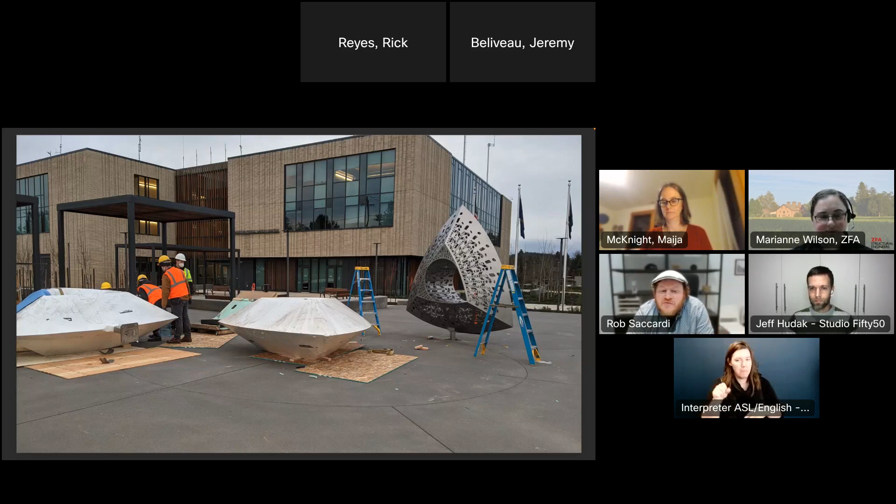And then this is the pieces getting put in. The electrician working diligently away, trying to get everything wired in place as the light was fading. We're chasing the daylight here.

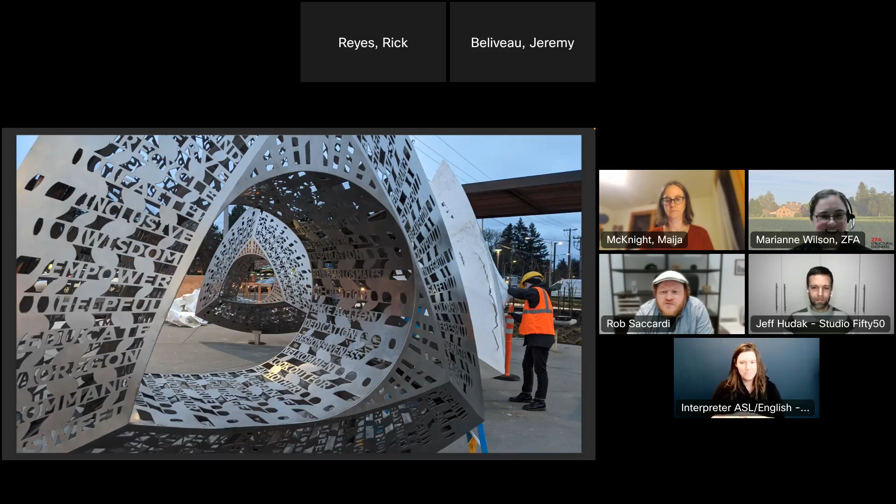And that's more of a finished shot.

This is a project we did in Cal Anderson Park for Horatio Law. This piece is called Lambda, and this was tricky because we had to get two large pieces of glass installed, but they don't support on their own. So we had to work more with the engineer to figure out how we were going to have piece A stay in place while piece B got slotted in there.

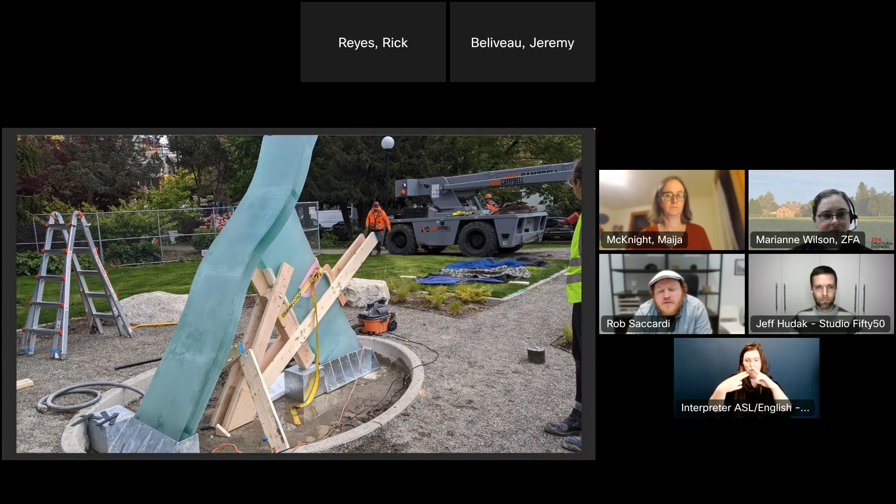And then you can see after we've gotten the piece in, unfortunately I don't have a great shot of it in action. And then we've got that armature taken off.

This is another piece, the same installation. This is a totally different thing. This was made up of glass plates that we got to stack together, so we really got to work by hand.

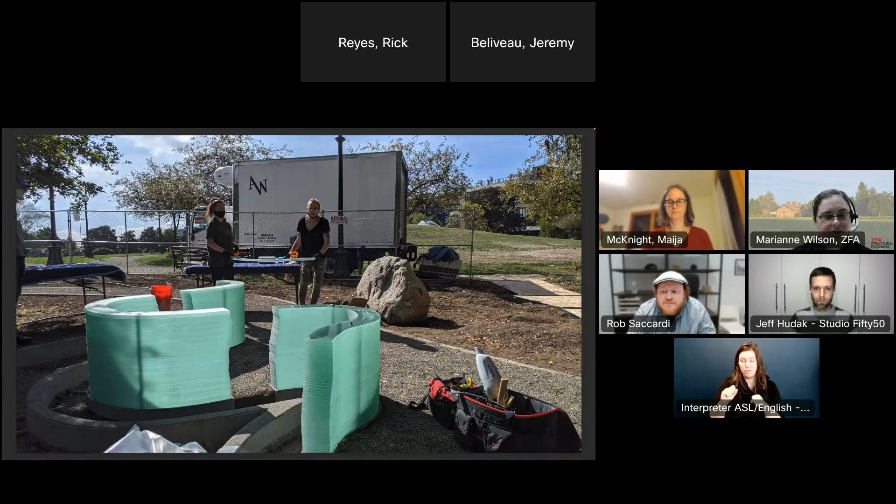And you can see the crew getting in there with, each piece with a suction cup on there so we could keep a good grip on it.

And then they get stacked up on those rods, which was kind of the finished installation.

The problem we ran into with this one is that out of those like 100-plus glass plates that got shipped over to us from Germany, a couple of them got damaged in transit. So we had to have new pieces made, and the artist had to be in contact with the fabricator and have new pieces shipped over. We had to swap some pieces out.

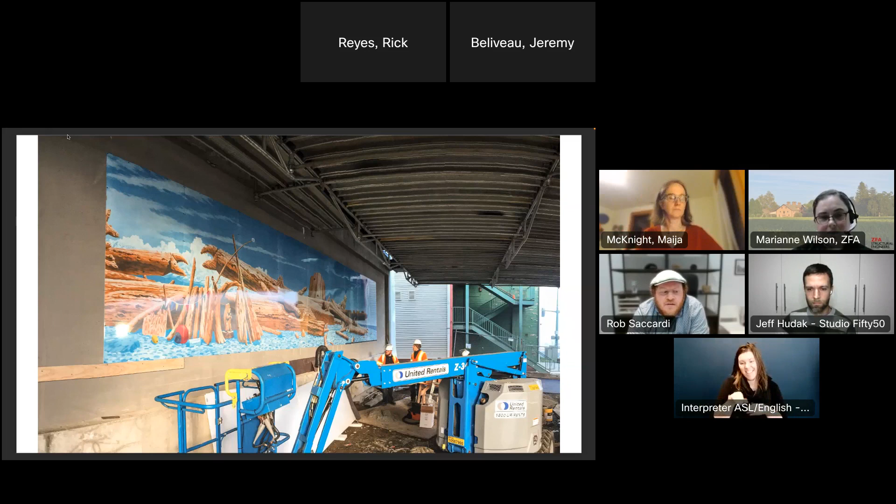This is us working again inside. The tricky part of this is just getting onto that wall. We're in a big, huge stairwell, installing a really large, really interesting wood three-dimensional piece. Next slide. You can see just sort of working from that scaffold in that space. Let's do the next one.

And the next one. And the next one. So that's kind of a range of the different projects we do. Next, thank you.

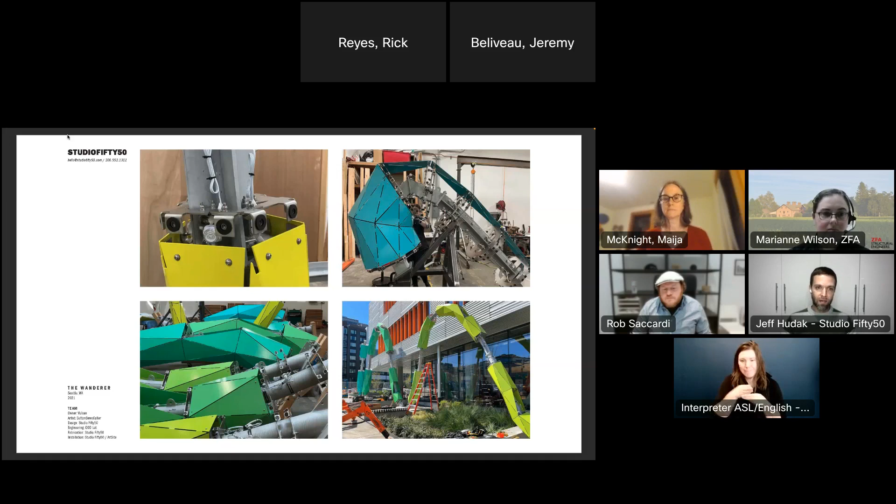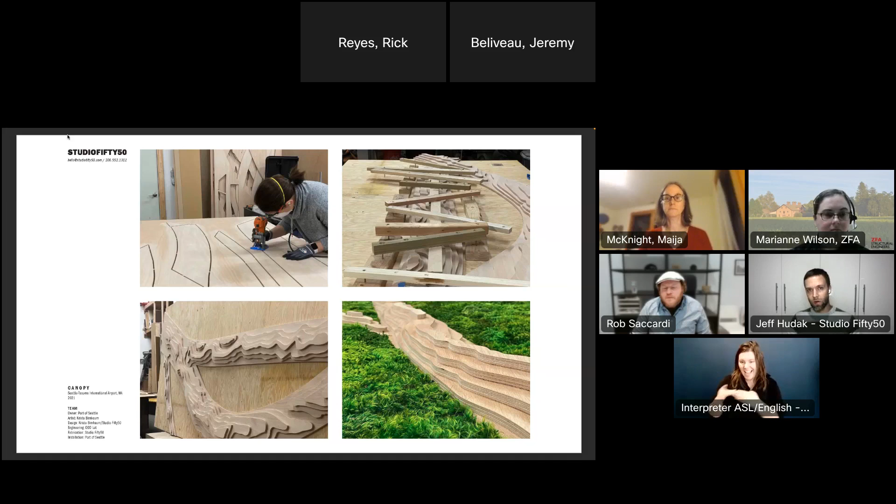Next slide. This approach allows us to include useful information such as part labels and fabrication alignment guides, things of that sort that are just etched directly onto the parts as we're fabricating them. That way, as we go into assembly and even installation, we've got these pre-built guides that we've brought from that digital model into the physical components.

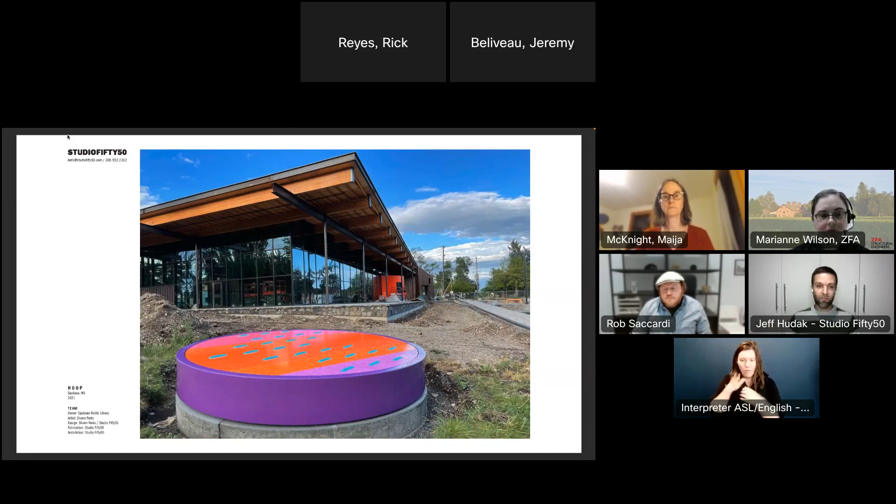It also allows us to evaluate the artwork geometry by using that 3D model so heavily, so that when we are figuring out exactly how we're going to lift or turn or pick a component, we'll look at where the center of gravity is in the 3D model, and maybe during the design phase we'll integrate a couple of pick points that allow us to orient it properly, just as it's lifted right off the vehicle, it can get dropped right into place.

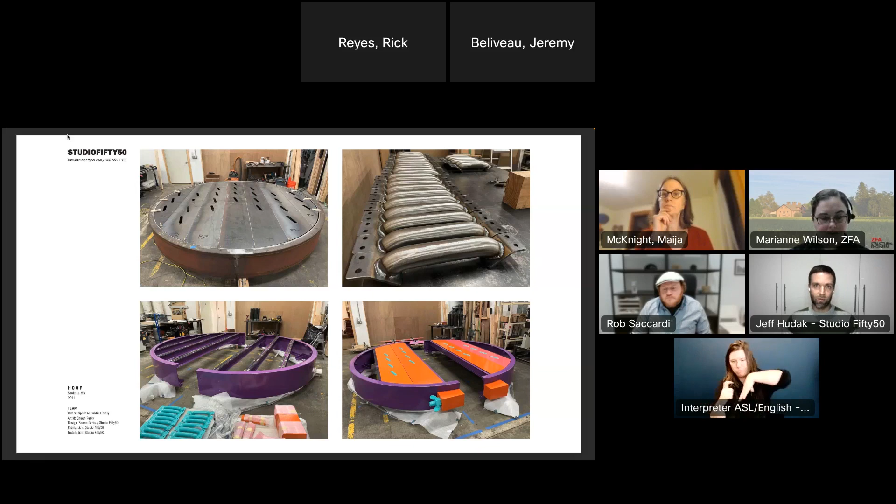So things like that, we really try to approach projects holistically, so that any of those downstream issues, coordination issues, some of those things we try to head off on the front end if possible. Not always possible though. As a studio, we offer a variety of services to various artists.

In some cases we're just providing an engineered armature, like for instance in the project we're seeing in the background. Can you go back one slide, please? Cascadia, which is at SeaTac Airport.

In this case, we provided the design services and fabricated the armature supporting these giant glass panels completely wrapping around an escalator bay. It was a tricky installation in a very public place. We provided the engineered armature and cladding, and the install was done by the Port of Seattle.

Other cases, we provide full service from concept development all the way through installation. We primarily do all of our modeling in Rhino 3D, as well as a parametric plugin called Grasshopper. These let us apply labels and other elements into our modeling without individually modeling each piece. It's kind of like writing a recipe for the artwork that allows us to create each individual component.

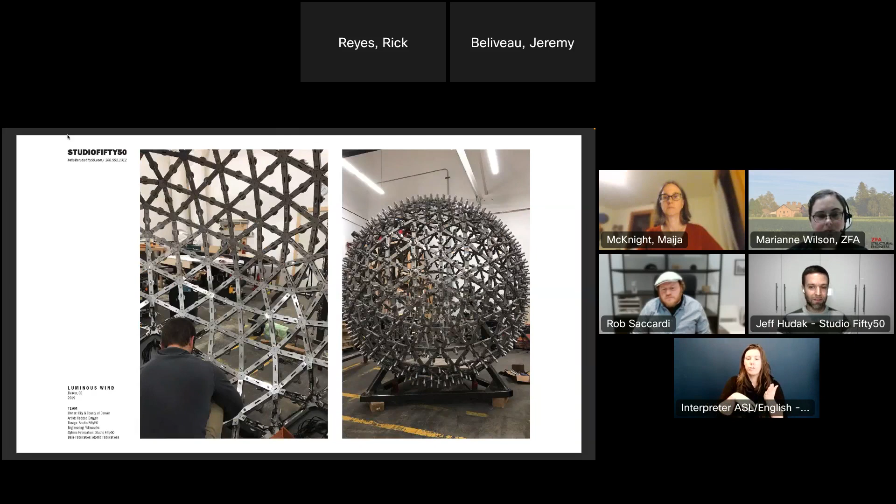In other cases, an artist comes to us with a fully developed design and engineering drawings, and they just need us to provide shop drawings to the engineer, fabricate, and install. However, in the majority of projects, we get approached with a sketch or a physical model and a rough sense of scale, and that's our jumping off point. Then we guide them through design development, shop drawings, fabrication, and installation.

These individual space frames, which we worked on closely with our engineering team to develop, became the armature for the cladding to hang off of. That was a really fun, interesting project—probably the largest space frame type geometry project we've done. It was really exciting.

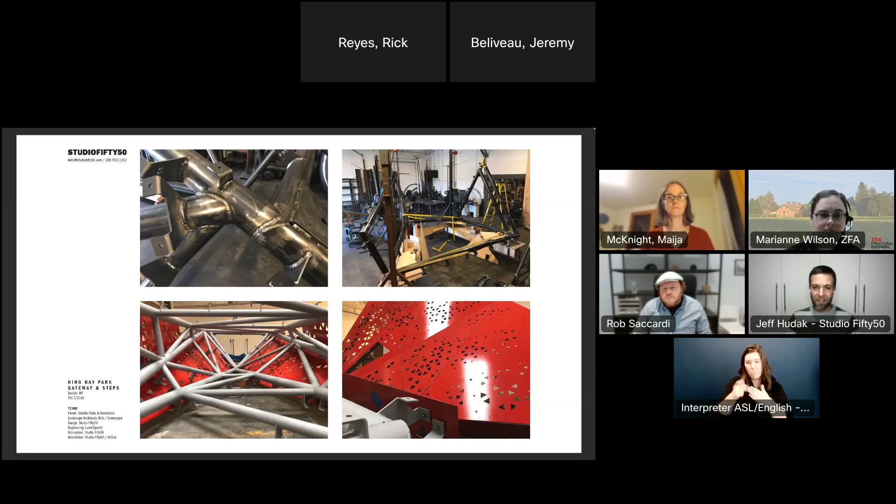Also in that park are the cultural steps. There are 5 of these steps that blend into the serpentine paths winding down through the new expanded part of the park.

This is where we talk about those unique one-off parts—there are something like 2,500 individual parts in these assemblies, and no two are the same. It gets really important to have diagrams laying out every individual part and where it goes within the structures, so that when we're welding them together, we're just following our instructions and our kit of parts that we've laser cut or water jet cut, depending on the project. That's how we bring these unique one-off pieces back together.

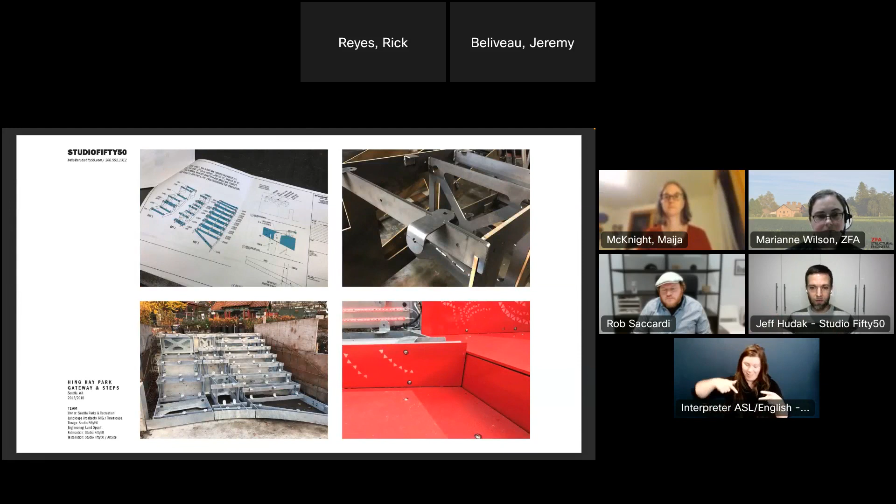Speaking of armatures, this project, the Wawona at the Museum of History and Industry (MOHAI) here in Seattle, was a piece we did almost 10 years ago for John Grade. In this case, we again designed and fabricated the armature.

The artist then shaped and carved all these panels. We provided the steel armature that all the cladding attached to, and machined 5 of the 6 sides of the components, gave those to the artist, and they did all this beautiful shaping and fluting on the exterior.

I think that's it—so that's kind of a brief version of what we do.

That's wonderful, thank you so much. So a question for all of you—Jeff, I'll start with you.

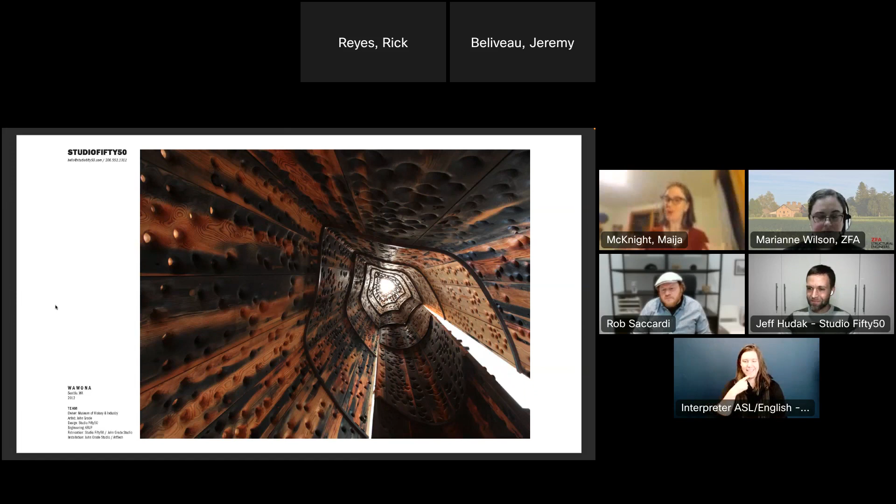You answered a little of this in your introduction, but when thinking about a public art project from beginning to end, from the initial idea to the finished piece in the ground, how do you see your role and touch points? For an artist on their first or second public art project, when is the ideal time to start a conversation with a fabricator? As early as possible.

It's really important, and this is basically how we approach all of our projects, in a very holistic manner. We try to have at our very early kickoff meetings engineer, fabrication, installation, and any other parties that might be involved in a project. That might be crane operators or a crane lifting company if we have a really weird or funky lift, and wanting to be aware of our constraints as we're working in the design phase.

I talked a little bit about even integrating pick points for the artwork to be able to be lifted into position during the early design phases. And so overall, we typically try to act as a project manager for the projects. We have a lot of experience in all these different little pockets of the process, and so typically we try to act as that touch point for all of the folks involved in the projects.

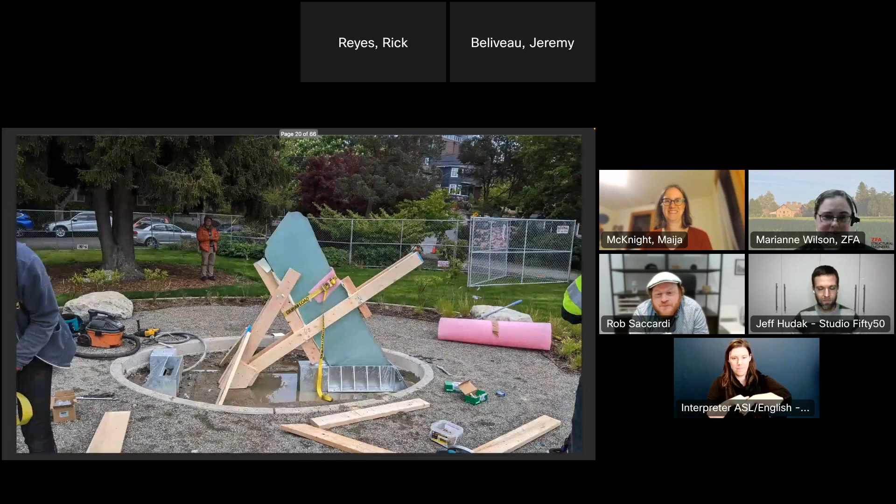Yeah, let's actually, can we go back to my slide deck, to the one with a large rock? I want to talk about that, I like that rock. Yeah, keep going, keep going. Yes, this one, okay, yeah, this was a cool project, I really enjoyed this process.

So the unexpected on this one, well, let me start from the beginning. There are two big components of this piece: this large rock, and then the bronze sculptural elements that come out of it. In working with the artist, I know they spent a ton of time doing concept drawings and working out all the details on these bronze elements, then probably making a mock-up, a CAD drawing, and having them fabricated and finished perfectly.

I'm sure that was 95% of the work, and they spent about 5% of the time picking out this lovely rock from a quarry and getting a couple holes drilled in it. For my end of it on the install, it was the opposite: I spent about 95% of the time and budget on the rock and 5% on the bronze part.

They gave me this 7,000-pound rock, which means it needs heavy equipment every single time you touch it. I had to flatbed it out to site, and we needed a pretty big crane to get it in place. On top of that, the base was really specific for this, probably a real engineering thing, but the first pour of the base was completely wrong and had to be completely ripped out and done again. So then you get into, oh, we had a date, the base is curing, oh, it's completely wrong, your project is delayed, there's a big cost overrun.

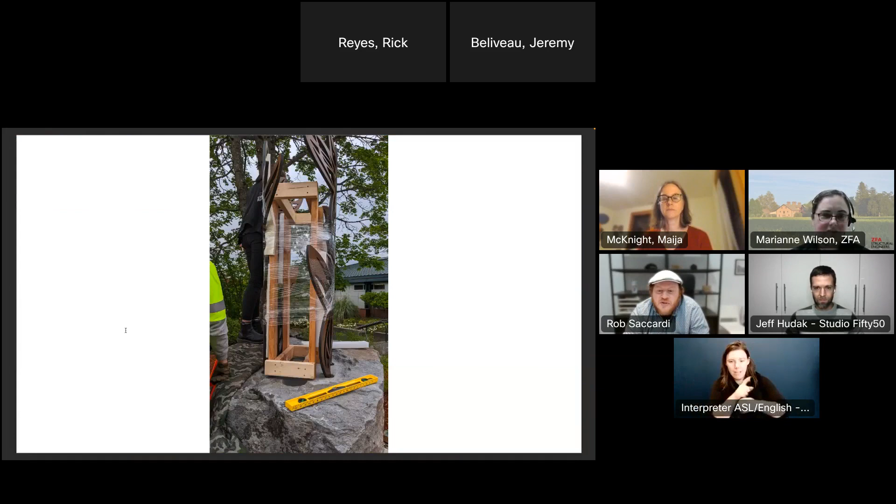I had to stand down all my contractors and all this stuff, and all this is because of an element that was probably, again, like 5% of the consideration on the project, but becomes the really difficult technical aspect of it from an installation point of view. After all those delays, it took days and weeks of planning to get the rock in place, and then about 4 hours to get the bronze installed once that was all said and done. So yeah, that's a good example, I guess.

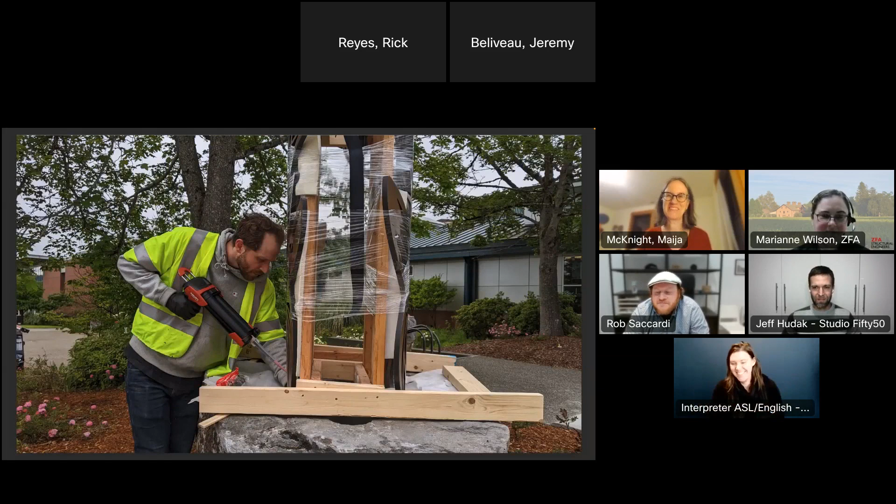Wonderful, thank you for sharing that. Jeff, I'd love to invite you. I think it's becoming a theme of foundations to some degree here.

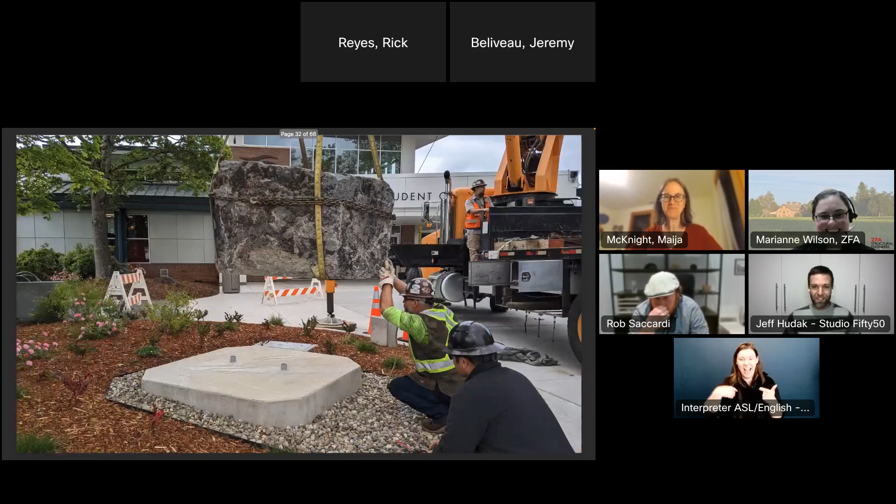We got out there, did our special inspections for all the re-steel and the anchor bolt locations. The concrete gets poured, we haul all this artwork out to site to start assembling it, and we realized the first footing had tilted significantly to one side. We're like, what's going on here? The weather was coming in, we had to hurry and cast it, we just had to get it done, and it is what it is.

So instead of the first day us going out and setting all the parts, all of the big pieces off the foundations, the first day turned into 100 and some foot long line, good old masonry line, trying to figure out, can we actually still hit the center line of all of our foundations without some weird kink showing up along the way.